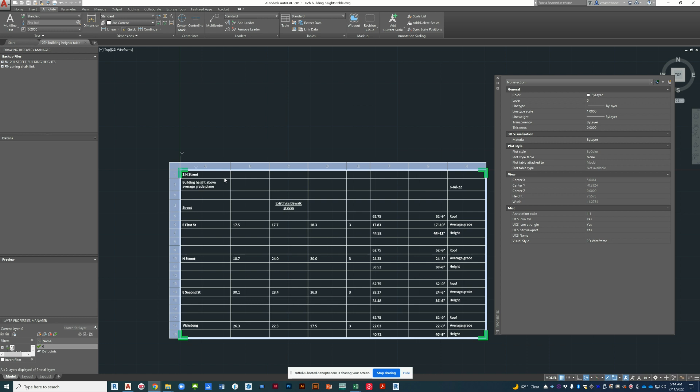The mechanism by which an Excel link can be transferred to a Revit file is indirectly through AutoCAD. I didn't design Revit, and probably someday they'll have support for tables. But in order to create this sort of thing in AutoCAD, this is what we have to do first with the source. And the neat thing about AutoCAD is you have control over the elements in the table, much more

so. Actually, more so, I think, than you have in Excel. Anyway, an important preparation in Excel is that your sheets should be simple. So if you have more than one sheet in the file, AutoCAD gets somewhat confused with it. It works very slowly. So this is a single sheet, and the range should be named.

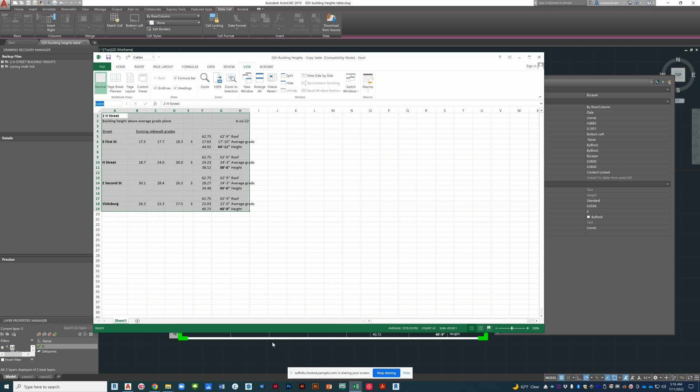You do that by selecting the range and just typing a name here. I've named that range table, and that's what I've transferred into the CAD file. Let's create a new CAD file for the second zoning spreadsheet. Now, it doesn't matter what template you use. I use as simple a one as possible because you don't really need any of the features. Template.

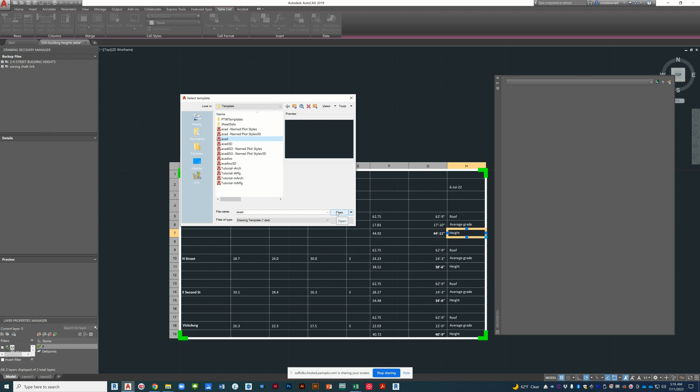And the Annotate tab ribbon menu in AutoCAD has this table feature. Now you can start with an empty table or provide one from a data link. Now what I had to do with the zoning sheet is eliminate the other sheet.

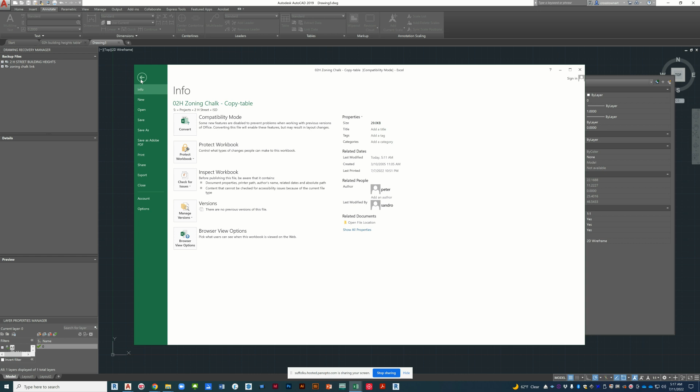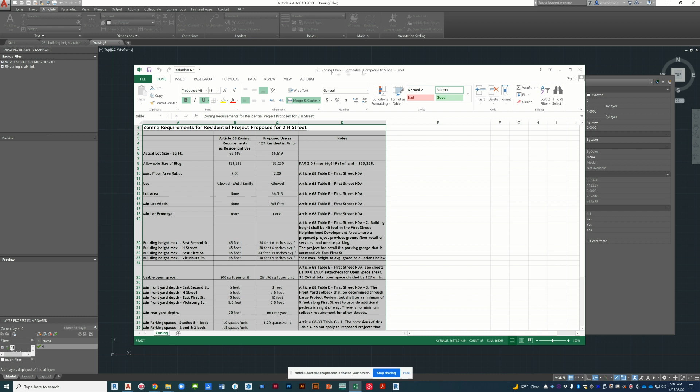Let me open up the original copy. Okay. See, this has two sheets in it, zoning and heights. I'm assuming that's a leftover from something else. So I eliminated the heights sheet so that AutoCAD doesn't get confused and saved it out. Okay. Selected the range that I want to import, assigned it a name, saved the file as zoning chalk copy table here.

So I'm going to start from a data link, no data link found, create a data link, Excel link, zoning. Doesn't matter what you name it, you're probably never going to use that again. Then you can browse for the file. And rather than link the entire sheet, you want to select link to a named range. Notice that it pulls up default drop-down names in that range.

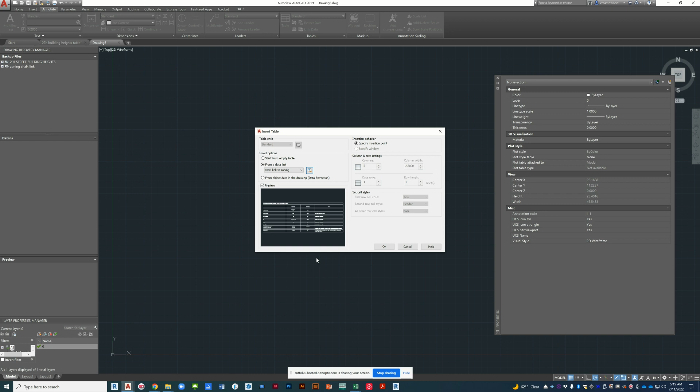I don't know why this is so slow, but I have clicked link to a named range, and that's just now responding. Okay, in fact, that's the range that I want. Hit OK. And then OK again. The preview appears. Maybe it's the preview that takes time. I don't know. And hit OK.

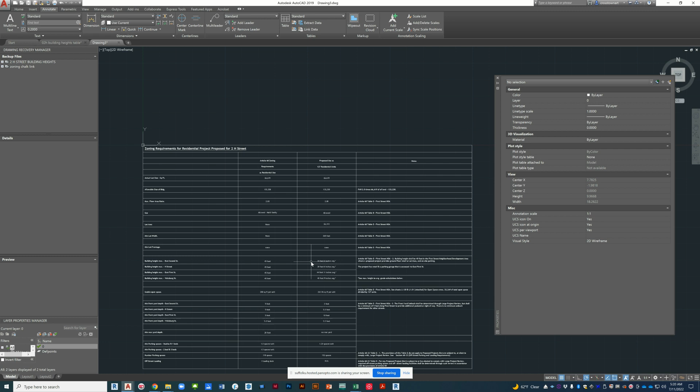And then what I do here is type 0, comma 0. So it basically places the top of that table at the origin, so there's no artifacting involved with being some distance from the origin. Okay, now you have an entire table. It doesn't very cleanly import text sizes, that sort of thing, so you can fix all that in AutoCAD. But the point is, once you do that, you can update the table and just relink it. I'll show you how that works.

So you need to save this. Save that drawing, and then I'm going to call that 02 zoning table. Okay, so now we have two CAD files. We can open Revit.

I should say that this is a one-way process. Let me explain what happens: the CAD file needs to get imported into Revit into a drafting view.

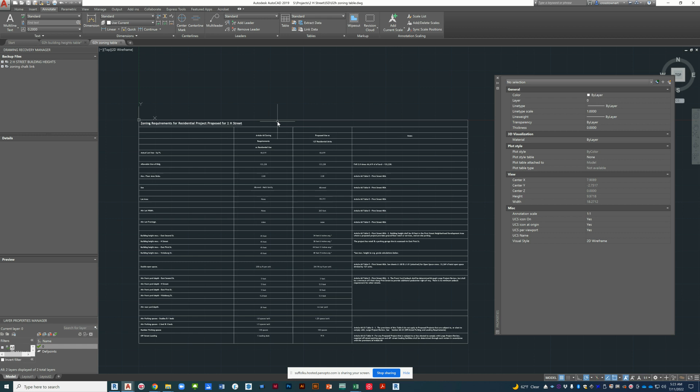I'm going to open an earlier version. Back up and just detach it and discard worksets, and put that window into the one I'm recording. Can't see it right now. While that's loading, okay. This is a detached file, so I'm going to save it as a detached file.

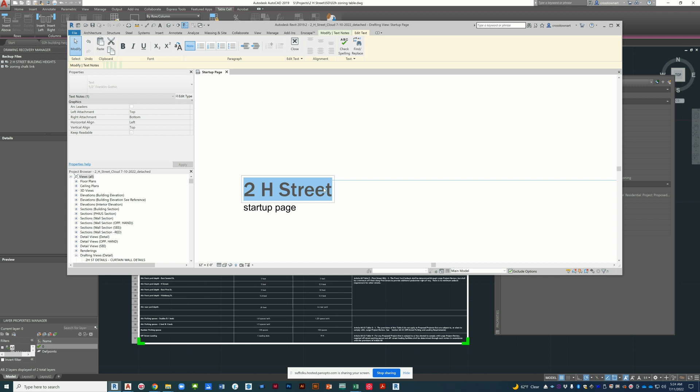Let's copy that file name and write it. I like to put the file name into the startup page, and I usually give this some kind of meaningful name, Excel to Revit study. Okay,

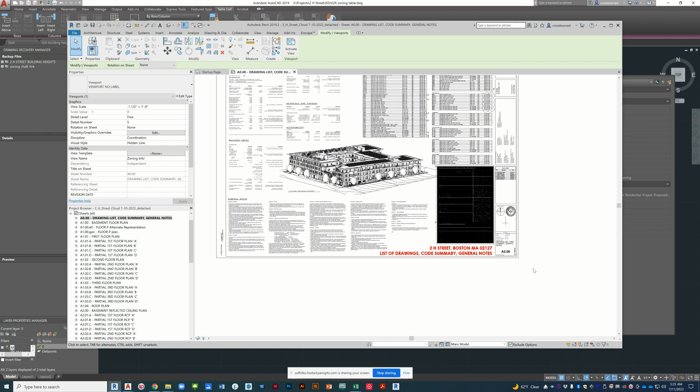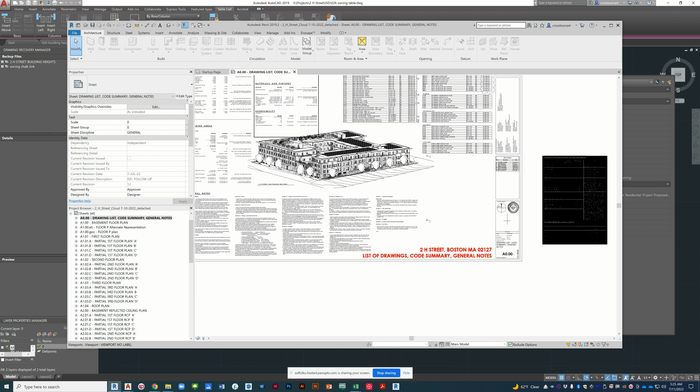bring up the CAD page, but sometimes, I'm not sure why, that appears inverted. Let's just move that aside for now. I need a drafting view at full scale, so I'll just maximize this window. View, yep, 12, 1:1. Let's start with building heights.

Now, naturally, we want to put all this in the cloud folder, BIM 360 or whatever it's called now, AutoCAD data links. Always link CAD. We don't want to import the CAD because we want to be able to update the CAD in case the spreadsheet data changes. So I'm going to link and go to the folder where that's being stored. What came first? I don't remember, but we'll start with the building heights.

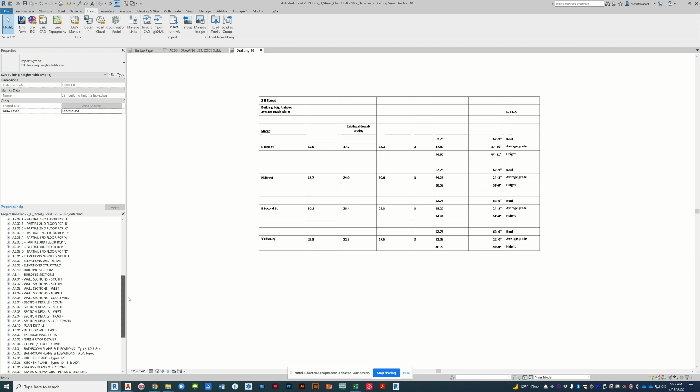Like all CAD links, it pins this, so you have to unpin it. Okay, and there's nothing much you can do with this in terms of editing. Let's give the drafting view a meaningful name. Excel. Okay. Very nice.

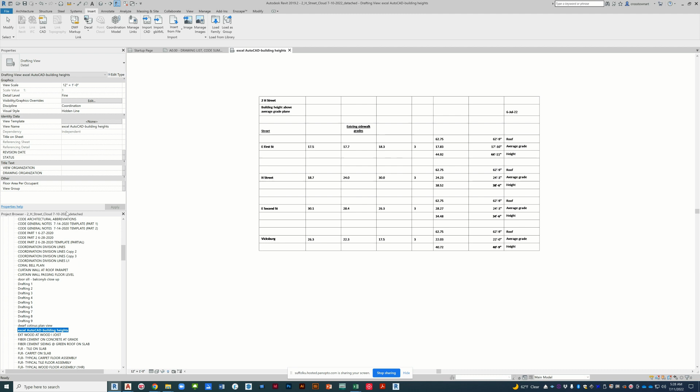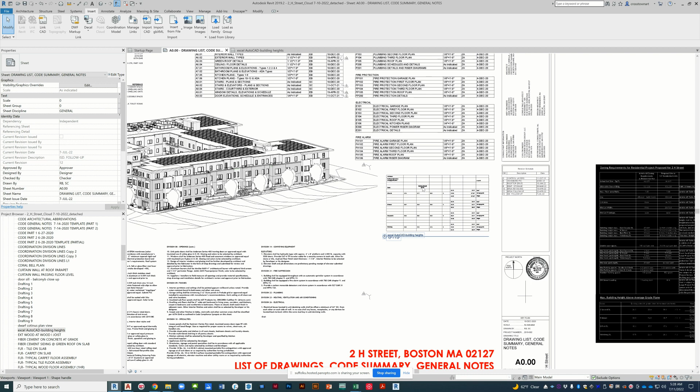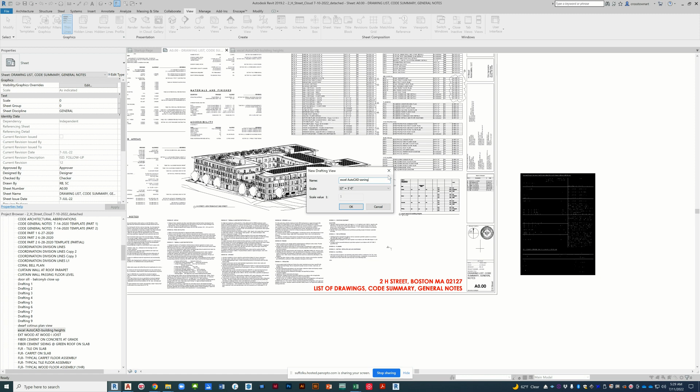Go to the cover page. And we bring that into, okay, text appears tiny. Well, let's leave the title on the viewport for now. I'm going to create another drafting view. Let's just copy this name. Call this zoning. This is 1:1. And into this, I'm going to link zoning table.

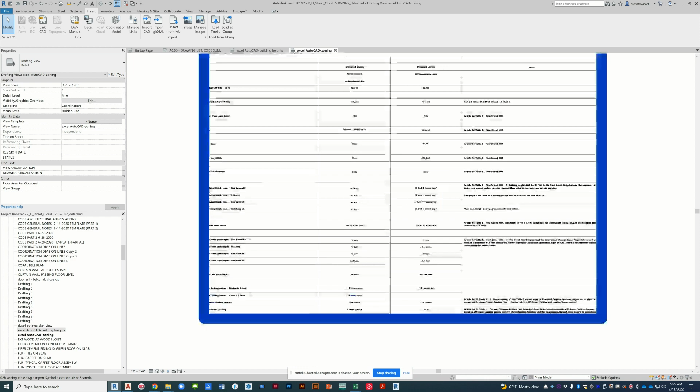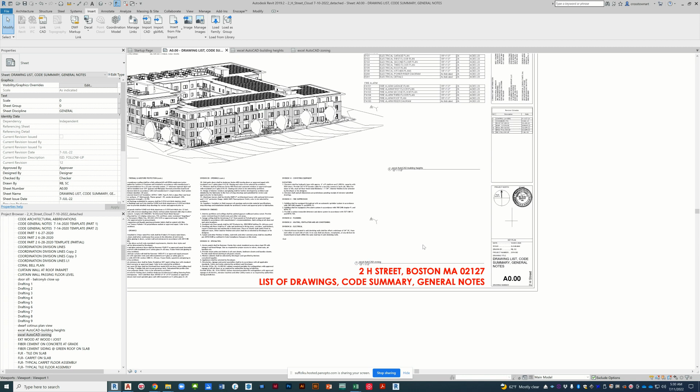This is already 15 minutes, so I'm going to stop here. And in the next video, if I'm able to do a next one today, I will show what we can do about formatting all this. Let's take that link. I could go back to drawing list, zoning, and we'll fix the text size and data cell widths in the next installment.